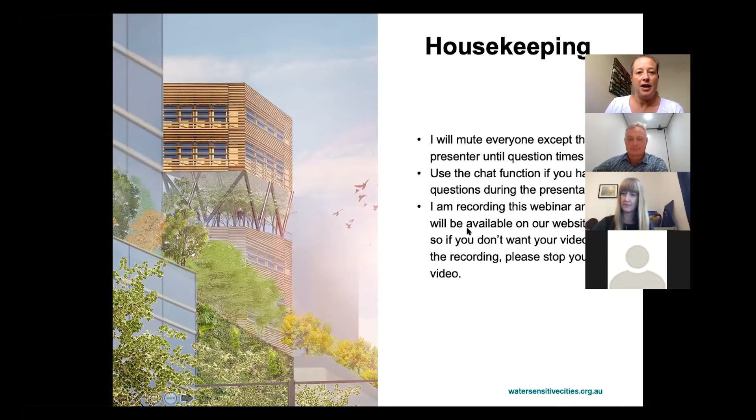All right, sorry, I've just unmuted myself. You can hear me okay? Yes. Yeah. All right, let me share my screen. Okay, so can you see that? Yep, all good? Okay, great. All right, thanks Beth for the intro.

I'm Belinda Hatt. I'm from Melbourne Water. I sit in the applied research team at Melbourne Water. But before I worked for Melbourne Water, I was an academic at Monash Uni, and I was actively involved with the CRC for Water Sensitive Cities in the first part of the program, when we were really heavily engaged in research, and I was involved with a lot of the research that underpins the biofilter adoption guidelines, which I'll talk to you about today.

Beth, do I need to do a bit of an overview about what a biofilter is, or just a really quick one? Yep. Oh. Okay. Sorry, yeah, just a really quick one. I couldn't find my mute button, and all of a sudden in Teams now, I'm like, where is it? It's in a different place. You can never find it when you need it the most.

All right, so a stormwater biofilter on the surface looks just like any other rain garden, any other garden that you'll see in the street or in a house. But underneath the surface of the rain garden, there's a number of layers of carefully selected sands and gravels that perform both the function of supporting those plants that you see on the surface, but also treating stormwater before that's either captured for reuse or discharged to the drainage system or a waterway. And so what I'm going to talk to you about today is what's in these guidelines, and a bit more about what each of the components of a biofilter is, or a rain garden, depending on what you like to call it, doesn't matter.

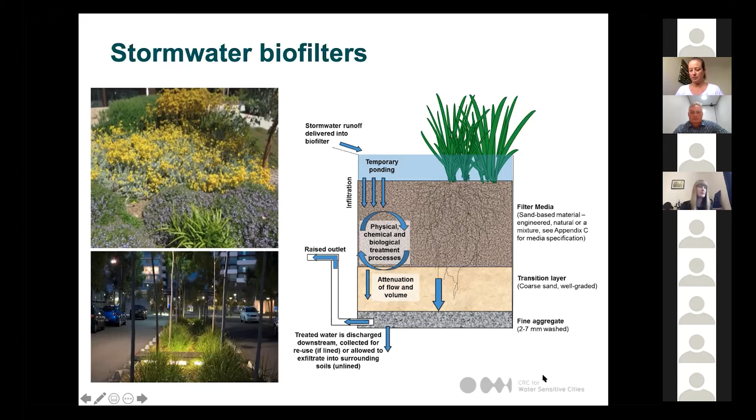The first biofilter adoption guidelines that we published out of Monash Uni were back in 2009, and these are known as the FAWB guidelines. The guidelines that I'm going to talk to you about today that we published based on the CRC research were published in 2015, and that was based on a whole lot of research that was done since those first guidelines were published. And so there was research that was funded directly by the CRC for Water Sensitive Cities. So as Beth mentioned before, it was project C1.1,

sustainable technologies. There was also a whole lot of complementary research that we undertook that examined the role of plants and other design features in biofilters. The research was both lab testing and field monitoring, and the field monitoring we did in Australia, Singapore and Israel. And the guidelines are also informed by a number of associated CRC projects that looked at governance and institutional arrangements and economic modelling and analysis.

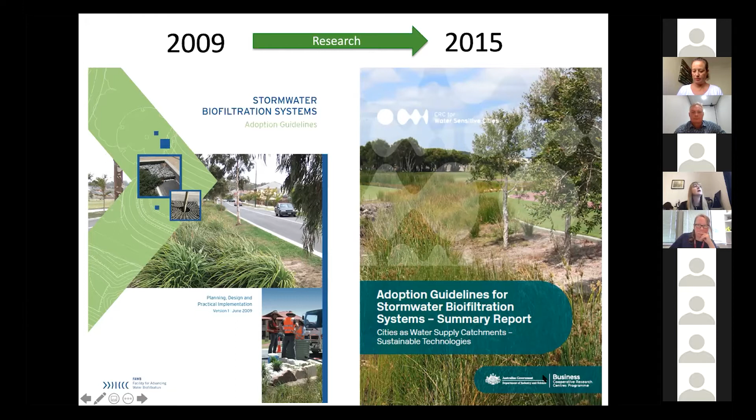So that's the research that underpins the guidelines. And the process that we used to actually develop the guidelines was quite a collaborative process. So we'd done research and we wanted to write the guidelines. And we knew that as researchers, we had a really detailed knowledge of the scientific processes that take place in a biofilter, but not necessarily all of the ins and outs, the practicalities of implementing and operating biofilters.

So the development of these guidelines was led by an industry advisory panel, and we had representation from every state in Australia that was involved with the CRC, and a range of different sectors, so we had consultants, people from local government, people from state government, to really get a broad perspective on the practicalities of building and operating biofilters.

And we thought this was really important because we knew that these guidelines needed to be relevant to stakeholders, and not just the engineers and scientists, but also those who are planning for biofiltration, and those who are really looking at the aesthetics of biofilters, so landscape architects, as an example.

The guidelines are arranged in a number of chapters, and if you've had a look at these guidelines, you'll know that they're big, they're long. They're not intended to be read from cover to cover. Think of them more as a reference manual where you're dropping in and out depending on what it is you want to know about biofilters.

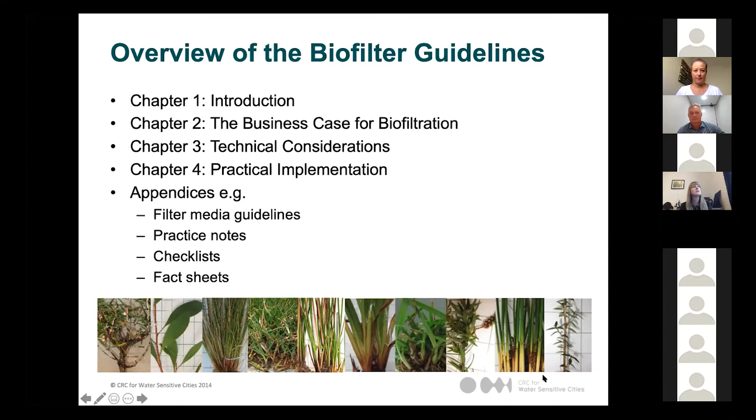One of the new things that we did with these guidelines was to write a summary report, recognising that the full report is a very big and unwieldy report. So we wrote a summary report, and this provides an overview of all of the key design, construction and maintenance considerations. And this contains all the information that you really should need in order to design and implement a biofilter.

The summary report also provides navigation to key sections of the main report if you want to know more about particular aspects of biofiltration.

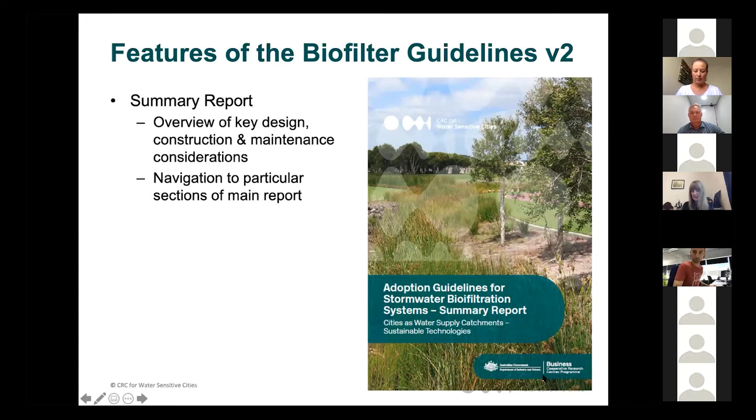So in the main part of the report, the business case for biofiltration, this is really about thinking at the early stages of building a biofilter, thinking about why it is that you might choose a biofilter over some other stormwater treatment measure, and what you can expect, how to justify and endorse their adoption, and also to think about the economic costs and benefits. And so that's where we really drew on some of the other research to come out of the CRC.

We've created a lot of illustrations and summaries to try to communicate some quite complicated information in a really succinct and clear way. So lots of information on how biofilters work, what components there are in biofilters and why they're important, to really help people think about where it is that you really need to stick with the guidelines, and where have you got some room to move?

Illustrations around the design process, which I'll show you soon, construction checks, maintenance issues, and also what you can expect from a biofilter in terms of its treatment performance and flow management.

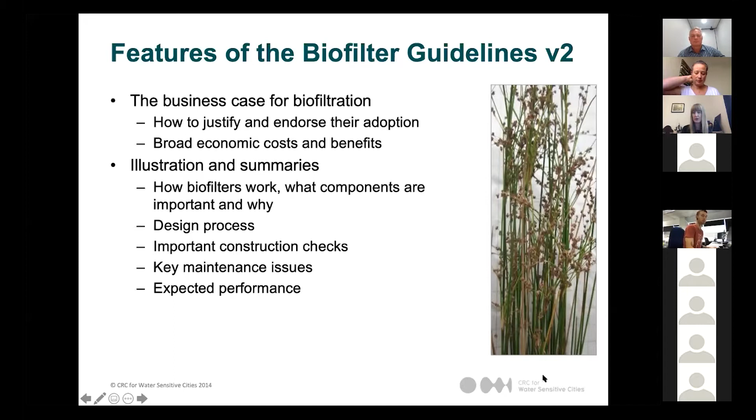Both those are really critical components for enabling the treatment processes to occur. And you need a way for treated water to get out of a biofilter. Two other things that you also need are some pre-treatment, particularly if you're in a catchment where you're expecting heavy loads of sediment, because like all filters, biofilters can be prone to clogging if they're not carefully managed.

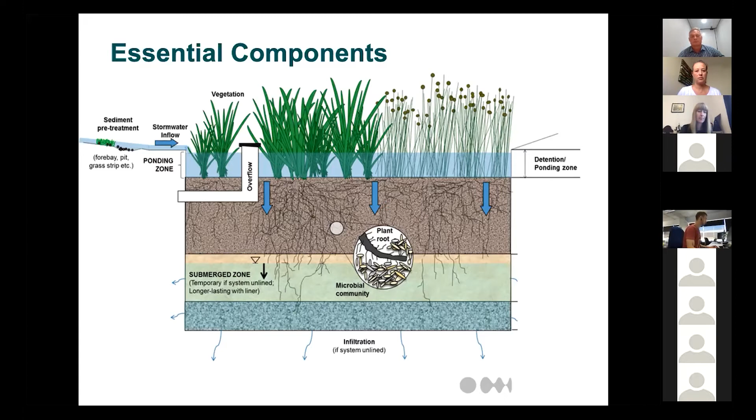Additional components that you might want to consider for your biofilter, depending on what the purposes of your biofilter are, include a collection pipe. You might want to create an internal water storage, also known as a submerged zone, and that can really be helpful for improving treatment processes, but also providing a source of water for plants in between rainfall events. And so you can create that internal water storage or submerged zone by raising the outlet of the biofilter.

You might also want to line the biofilter. Depending on what's around your biofilter, you might have some assets like a road or building foundations that you really don't want to be getting wet. And so you might want to line part or all of that biofilter.

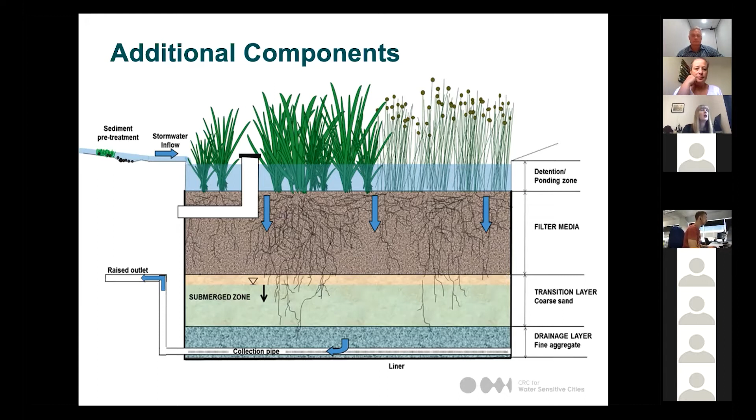And so in the guidelines, you'll see there's a summary table that describes each of these components and what their function is, and also provides a section guide to help you navigate to the main section of the report if you want to know more about those particular components.

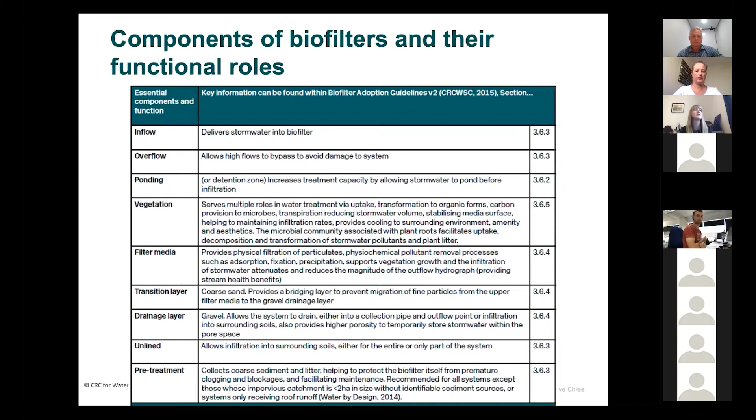I think one thing that we developed in this volume of the guidelines is a flow chart to help you navigate through the different decisions that you need to make through the design process. And so these are broken down into 4 main sections. So thinking about your objectives, what is it that you want your biofilter to achieve?

Characterizing your site, understanding soil types, what's around your site, including the vegetation, what the aesthetics of your surrounds are, because that helps inform the design process. And stepping through, depending on each of those site conditions, linking to design parameters that you need to consider, and some tips on risks to long-term performance and how you might manage those, minimize those risks.

In these guidelines, we've also provided a much greater list of plants that are suitable for biofilters. So if you've seen the FAWB guidelines from 2009, you will know that we had about 6 plants in there that we knew were really good for stormwater treatment. And we knew at the time that was a pretty limited list of plants, but that was what we'd been able to research at that point in time.

In between the first and second version of the guidelines, we were able to do a lot more research to expand that list, to test a whole lot of different plants, so that we had a longer list of plants that we knew were good in biofilters, but also to understand what it was about those particular plants, what traits made them good for biofiltration. And so what we were able to do was to provide a much greater selection of plant species.

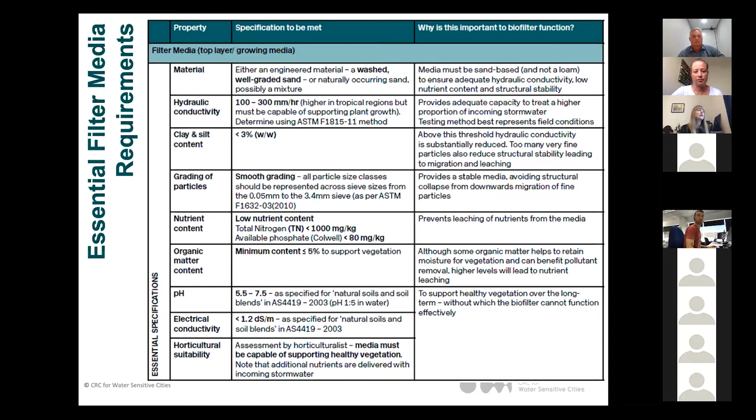And I think one thing where there's been particular confusion in the industry in selecting appropriate filter media for biofilters has been around drainage rates versus particle size distribution. And we've put particle size distribution in the recommended filter media properties rather than the be all and end all, because what we were finding was people were saying, okay, well, we've got a media that drains at the appropriate rate, meets all the other specifications, but it doesn't meet the particle size distribution, so it's not suitable.

And I was, well, that's not actually the case. The particle size distribution is of lesser importance than the actual drainage rate and all of those other essential properties. Really, what the particle size distribution guidance gives you is a starting point to help you identify what could be a suitable medium.

Also in the guidelines, there's some more specific guidance if you're interested in using biofilters as part of a stormwater harvesting system. So if you are designing for stormwater harvesting, then the pollutants that you're most interested in will be different to those if you're designing a biofilter for protecting waterways and bays. So we're much more interested in pathogens and toxicants, and so things to think about there to help maximise the removal of those pollutants.

There's also a section in there on designing biofilters that look attractive, to increase the acceptance of biofilters by the community. Almost all of the plants that we recommend are native plants. We started with native plants because they're adapted to local wetting and drying conditions. But we also appreciate that not everyone likes the look of a native plant, and so there's tips in there on what to do if you want to design a biofilter that suits a particular look and fits in with the surrounding area.

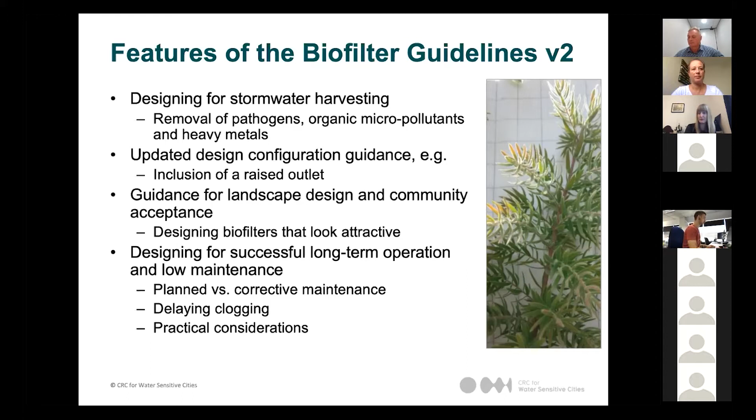And lots of practical guidance on maintenance, things like how to delay clogging, and keep your biofilter operating to the full design intent for the full intended lifetime. At the end of the guidelines, there's a whole heap of appendices that break down some of this information and present it in different ways. So there's a whole lot of fact sheets on how biofilters work, on how to design them to meet particular objectives, so that they're suitable to particular site conditions. Breaking down the bulk of the information into bite-sized pieces, depending on what it is you're interested in.

There's also a publications list so that you can see all of the research and development that underpins these guidelines. And there's also some standalone guidelines as well, particularly for the filter media, but also on designing biofilters that look good, and a range of maintenance field sheets and checking tools to help at the other end, once you've designed them and got them in the ground, how to look after them. So that's all I wanted to say today to give you an overview of the guidelines.

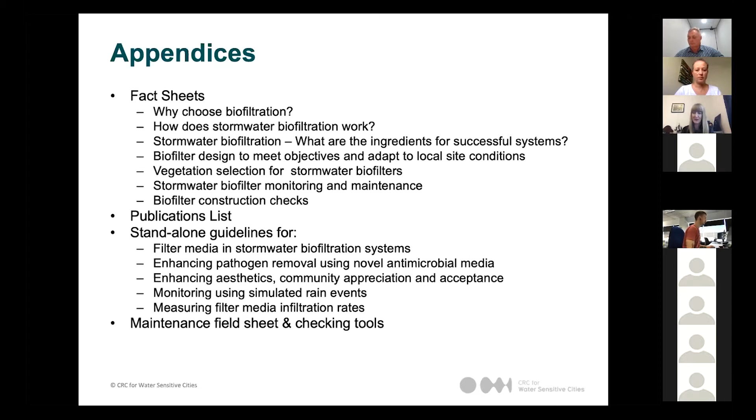And to finish up, I just wanted to acknowledge the contributions of the co-authors and all of the researchers that did all the work that underpins these guidelines, and also the industry advisory panel that guided the development of the guidelines. I think if we'd written these guidelines on our own, it would have been a whole lot easier because we wouldn't have had to balance a range of viewpoints. But because the industry advisory panel was there working with us, I think we were able to develop guidelines that were much more relevant and much more useful.

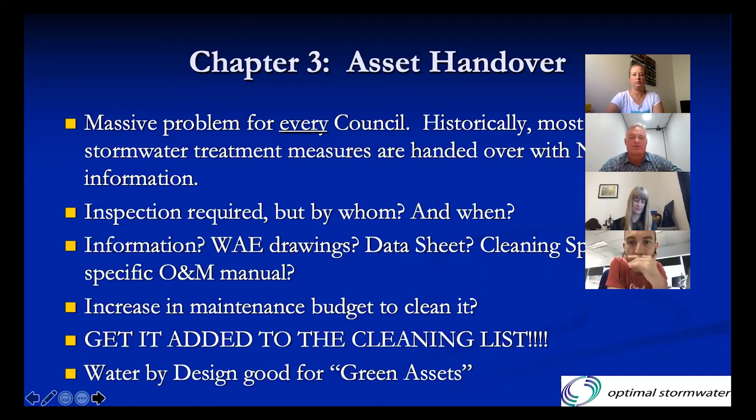As I mentioned there in the capital letters, get it added to the cleaning list, because councils sometimes struggle to get accurate information on their proprietary type GPT solutions. These ones, especially when you start adding in swales and bio and things, sometimes they're just not on lists. It seems the green infrastructure is harder than the grey infrastructure. And as we've mentioned in the guidelines themselves, there's a good section on the maintenance and asset handover processes in relation to green assets in some stuff by Water by Design.

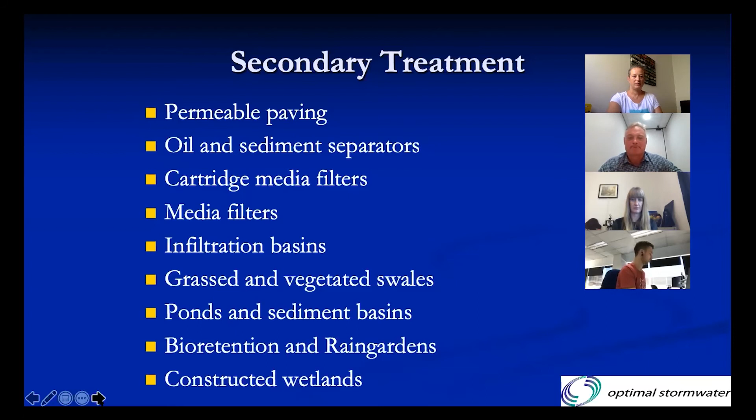Right, just a quick recap. So for every single device, it's broken up into monitoring, then regular cleaning, comprehensive or annual cleaning. Thanks, Beth. With ponds and wetlands, quickly, this is your monitoring. Typically, inspect monthly in the same place. If you send 2 different people and they go to 2 different places in the wetland, they'll come back with 2 different results and they're now both irrelevant. You need to consistently monitor in exactly the same place. And hopefully there's been some thought as to where that is. If you monitor right at the front and you get a heavy sediment load, you could be cleaning too much. If you monitor right at the back and everything's dropping out in the first half of your wetland, then you could have the opposite effect.

Obviously, it's important to inspect inlets and outlets. At the end of the day, these are a hydraulic system. They have to function for the stormwater going through. If inlets or outlets are blocked, they compromise functionality, not just the performance for your stormwater treatment. They can also impact flooding. A typical bugbear that I've seen done wrong many times is the use of macrophytes around an outlet to hide it and shield it, especially if that outlet is near the bank. The problem with macrophytes is during a flood event, they all fold over and coat over the top, and then you've compromised the functionality, and now we've got overland flow happening because your outlets are blocked with macrophytes. Obviously a good idea to keep some room around it and keep your eye on the maintenance of that.

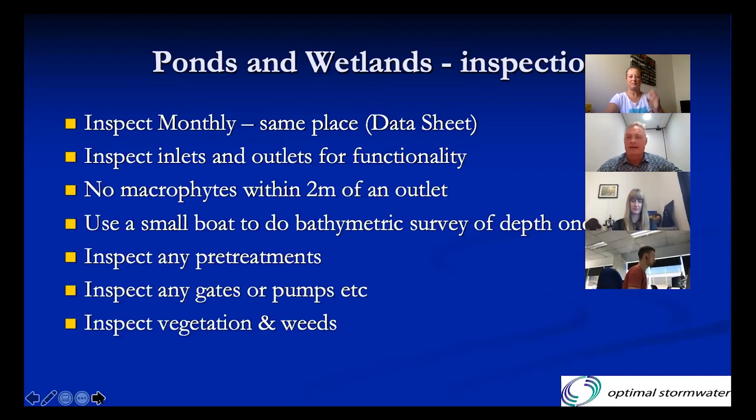Regular cleaning for your wetlands is typically focused on the GPT upstream to remove hopefully 90 to 95% of the physical pollution load from getting in, and hopefully the fine stuff, the finer organics, neutrally buoyant stuff that does get in can be biologically consumed as part of the natural ecological processes.

If you can't have a GPT, perhaps you're looking at a fallback position of a sediment forebay with or without a boom. You can obviously use macrophytes and things to help try and corral primary treatment, but you certainly don't want to have a whole bunch of pipes coming into the center of your wetland and everything just spread right out across. That just is the most expensive to look at maintaining.

Obviously, the more you can segment your wetland underwater, the less impact you'll have when you're pumping down water volumes, less water you've got to get rid of. And obviously, if you're then catching turtles and things and letting them go, you can let them go in the rest of the wetland. And when it all fills back up, they'll populate back to where they want to be. So there are far better designers in this world than me when it comes to wetlands. But from a hydraulics and maintenance point of view, that's a key one that I would always like to see in there.

And obviously each wetland or pond will need its own site-specific cleaning, access, ideally a low flow bypass while you're cleaning it, because you don't want to be pumping the water out while it's busy filling back up. Decanting, whether you can dry sludge and things that are pulled out on site, or whether you need to suck it into trucks and take it away. The more stuff you can do on site, the less water you take away, the more cost effective it's going to be. And obviously you need to understand the biological impact with water volumes, depth, and vegetation that's actually in these things. Thanks, Beth.

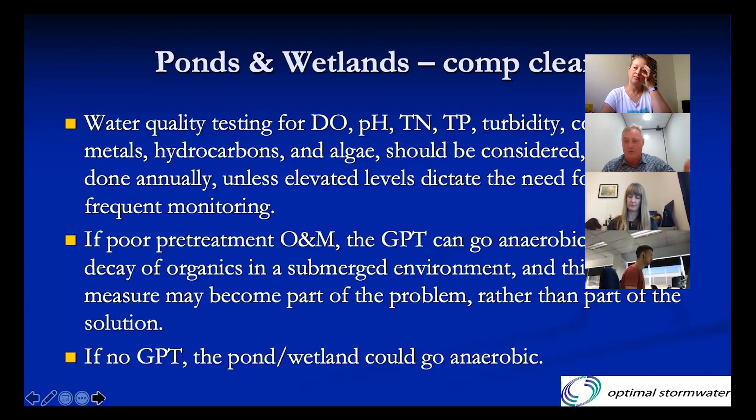If you do have poor pre-treatment or poor operational maintenance of your pre-treatment, you can have GPTs and pre-treatment systems actually go anaerobic and become part of the problem. So obviously keep an eye on those. And if you don't have the GPT and all the organics are going in and being caught in your wetland and then going anaerobic, you've got the same problem, but now it's twice or triple or 10 times the price to address it. So there we go.

Thanks, Beth. I didn't realize there were so many slides on wetlands.

Obviously, the dewatering of these things is incredibly complicated, and bypassing of water when you're doing it is incredibly complicated as well. We were actually involved in a wetland which had been neglected for about 20 years. It originally started as a spill control basin, the Blackmore wetland over in the Inner West Council, and we sort of innovatively reused a lot of the vegetation and buried it under all the sediment we took out, because there was so much sediment in there, and it would have cost an arm and a leg. It would have doubled the price if we'd added all the disposal into it.

So we buried it, topsoiled it, then planted everything. And interestingly, we got macrophytes growing that weren't initially in the wetland, they were growing in all the surrounds. It was actually quite interesting and a real success out there. But again, that was offline and much easier to deal with than Centennial Parklands at the moment, that are going to look at dewatering and cleaning one of their ponds for the first time in about 30 years. And it's got 2 meters of sludge in the bottom of it and 2,000 cubic meters of sludge to come out. So bypassing is a big issue.

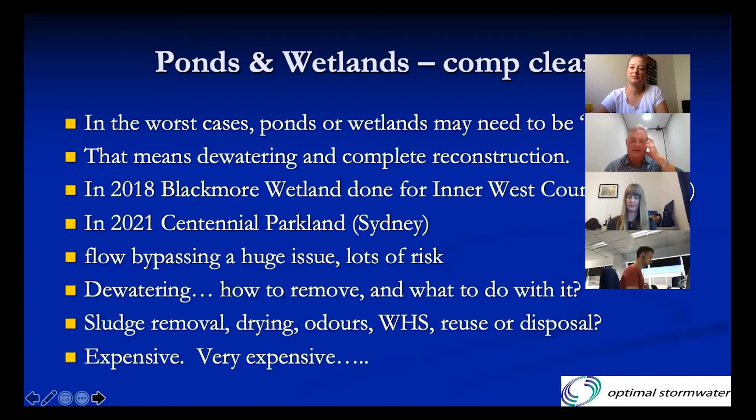Where and how you dewater it, there's lots of issues and lots of risks with that, of course. And then when you pull it out, what do you do with all the water? And obviously, once you've pulled out the sludge, what do you do with that? How do you stack it, store it? How do you dry it? And then what do you do with it? Can you reuse it or can't you? So, cleaning of wetlands, very expensive. My advice, make sure your pre-treatment works and you look after it. Try and minimize your cleaning of wetlands.

It was nuclear green with some outrageous algae. The pre-treatment had been non-operational. There were 2 lines coming in. Both pre-treatment solutions had bypassed. Diversion meant there was no flow coming into the pond, so it had gone completely stagnant.

The pond was too high, so it was, well, too shallow, I should say. There was sporadic vegetation, anaerobic breakdown, nutrient cycling. Anything and everything was going wrong with this poor wetland. There was no planned access and poor ability to actually get in and maintain it.

Having said that, 2 years later, after the audit was done, rectification works were planned. The rectification works were all done. The GPTs were cleaned and fixed. They got the hydraulics right. They got an access in there. They did planting, and with new fresh water regularly topping it up, the treatment process all came back, and the wetland is now spot on. So you can bring these things back. None of them are a lost cause.

Thanks, Beth. Righto. Bio is not nearly as long as wetlands, but obviously inspections of inlets and outlets. It's important to understand that if you don't tell people exactly what you want done, they'll turn up, they'll trim some of the vegetation, they'll pick out some of the litter, they may or may not take some of the sediment, and they'll call that done. In some cases that may be acceptable, in others certainly not.

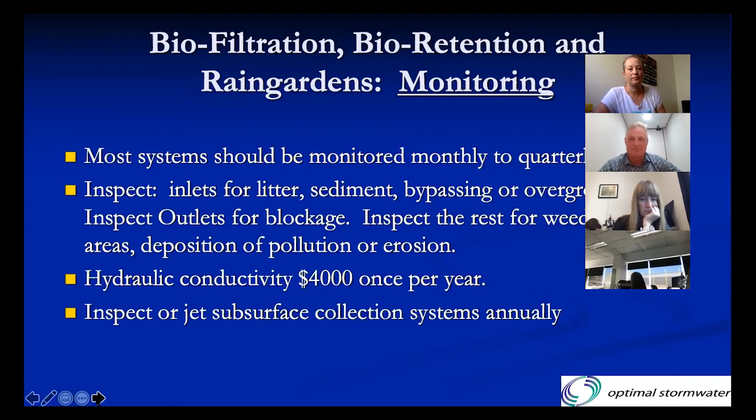Some of these things may or may not need a site-specific cleaning spec. In the guidelines for the maintenance of stormwater treatment measures, there it is. Ta-da! Get yourself a copy.

You may have multiple solutions that were designed on the same basis, and you don't need a separate one for all of them. You can use a generic one, and certainly the advice and guidance in the adoption of biofilter information out of the CRC, WSC, there's some great stuff in there. So whilst with all the GPTs and that sort of stuff you need a site-specific cleaning spec for every single one, these, because a lot of them are similar, you can get away without it.

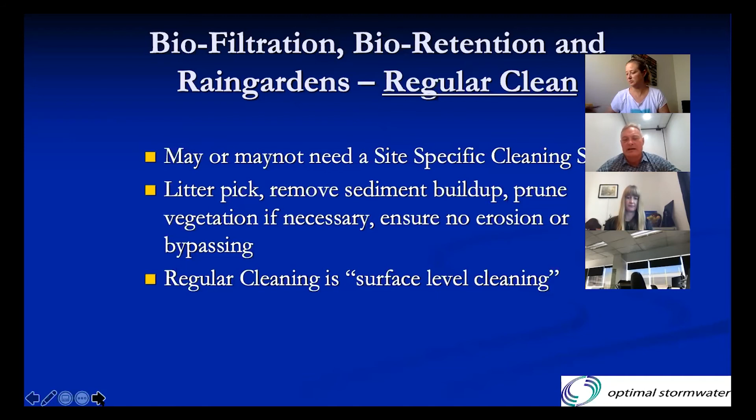Obviously, regular cleaning involves picking up litter, pruning vegetation, ensuring no erosion, no bypassing and removal of sediment. Regular cleaning is largely classified as surface level cleaning. Thanks, Beth. The more comprehensive clean is obviously looked at removing a layer of the media.

Experience told me years ago when I was with the EPA and they were looking at sand filter design for treating flow coming off car parks and roads, which is where a lot of your bio is, downstream of car parks and roads. You do get asphalt roads, which are made of bitumen and stone. The bitumen is a hydrocarbon. It breaks down in the sun, and you get a constant, very low level sheen of hydrocarbons coming off every bitumen road. Not to mention, stuff off tires, etc.

So you can get a layer building up. And what typically happens is the majority of the inorganic sediment and that sort of stuff, and if you do get blockage, it's all in the top inch. So you can come in with a spade and scrape off the top inch of media or sediment, etc., and typically bring back 80 or 90% of the life to your bioretention.

And you probably want to put another inch of new stuff back. But if that's not sufficient and you've had too much in the way of fines and clays come in, your system is not reaching its hydraulic conductivity objectives, then you may need to be in line for a rebuild or a reset, which typically means ripping everything out. It's very hard to use an excavator and not smash through all your PVC piping.

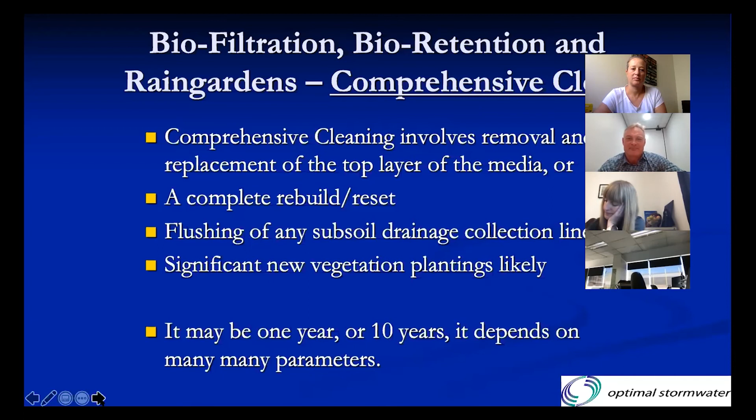So, obviously, the O&M guidelines are available from Stormwater New South Wales. You can log on to the website and look at getting yourself teed up for a training course and getting a copy. At the moment, all the other states are looking at getting the guidelines updated for their own states. So it's very likely that within the next 12 months, South Australia, Victoria and Queensland will potentially have these guidelines updated for Stormwater Queensland, Stormwater Vic and Stormwater SA, and they'll come out relevant to the locals down there, and they'll be coming into use.

There's lots of practical, great information. It's very practical. There's no design stuff in it. It's all about maintenance. There's one-page cleaning specs for all the proprietary type solutions, and that's a real advance in the industry that was never there before. The great thing for councils is you'll basically be able to say when your next cleaning tenders are coming out, clean in accordance with the guidelines. So if you don't have an individual one-page cleaning spec for all of your different devices, you'll be able to refer to this, and then that gets you at least halfway to 3/4 of the way there.

So as part of the stormwater industry, we're looking to make life easy for our key clients, of which councils are top of the tree, and obviously all the other asset owners that deal with these things. But if you could just say clean in accordance with the guidelines, that's going to get you out of trouble a fair whack of the time. We are running relevant training courses every month or two. So councils and cleaning contractors should get themselves along, get trained up in how to use these, and we'll be in for a bigger and brighter future.